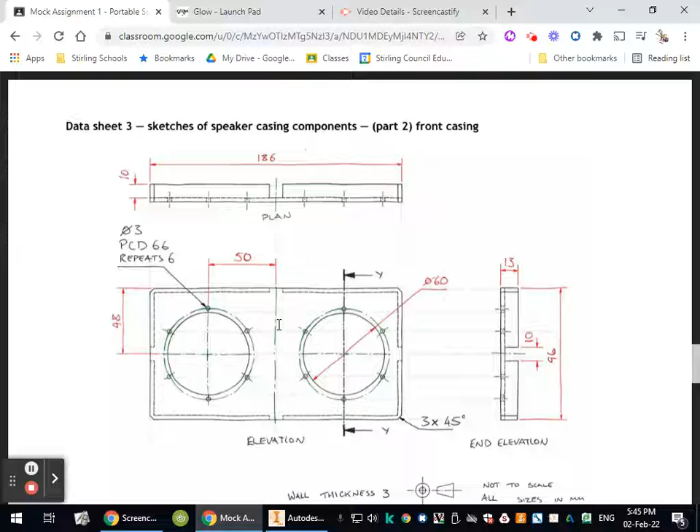So just because sorting out the bit in the middle that would have a gap might be a bit of a hassle, I think my inclination is probably just to model it as a whole piece rather than modeling one half at a time. But you could go about it that way. It doesn't really make much difference.

So let's get on with it. Its overall size is 186 by 96 and it's 13 deep.

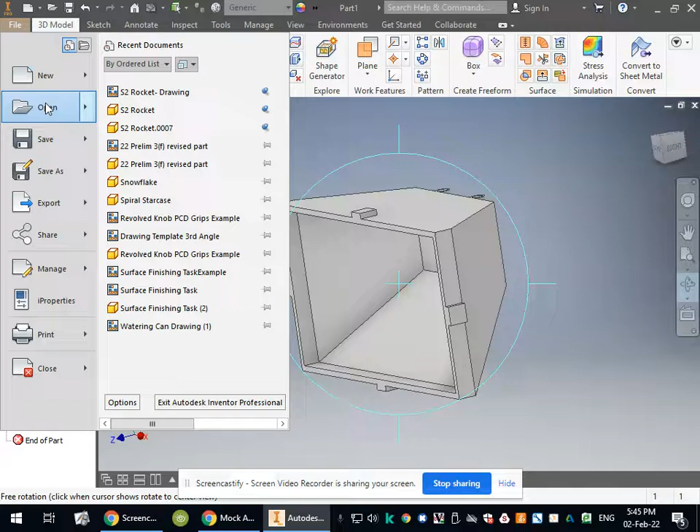So let's create a new part file. And again, pick our work plane that's going to orientate it correctly. And I would probably want to use, again, which one here? Yeah, 3. Try again, click on the wrong one. 2-point center rectangle.

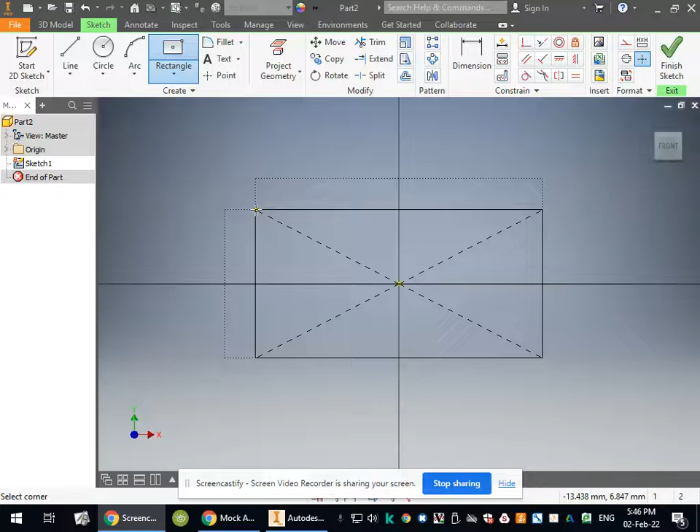So we said 186, 96, 13. So 186, 96. And we'll extrude that, 13, back the way.

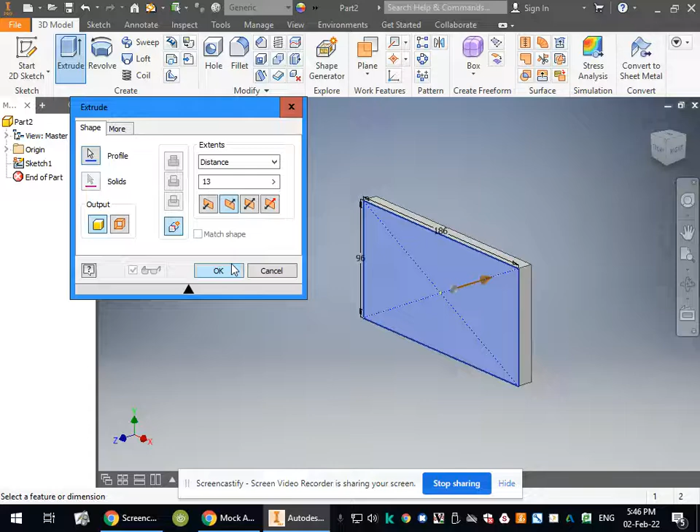Now, the next thing that we need to do at this stage is just to shell it. So we'll shell it from the back and we're going to give it a wall thickness of 3 as it specifies here. Shell, 3 millimeters.

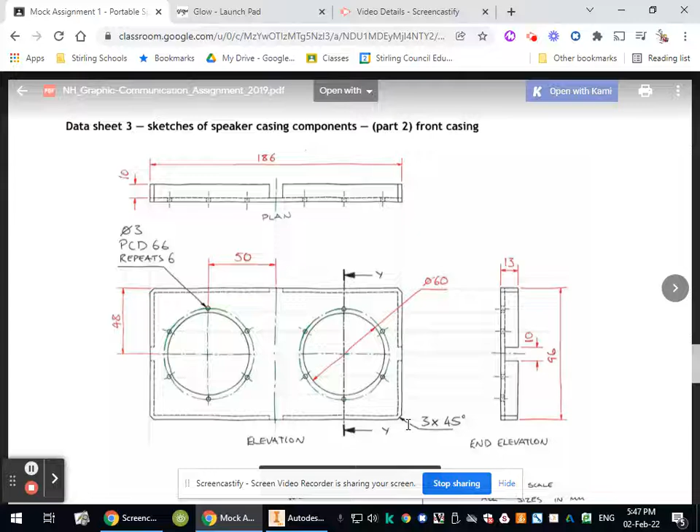And having done that, we could now add our chamfers to the corners here, and they are all 3 by 45, so that just basically means a normal 3mm chamfer. So we'll go around and find our chamfer tool, 3, we'll go select these. There we go. So that's that part done.

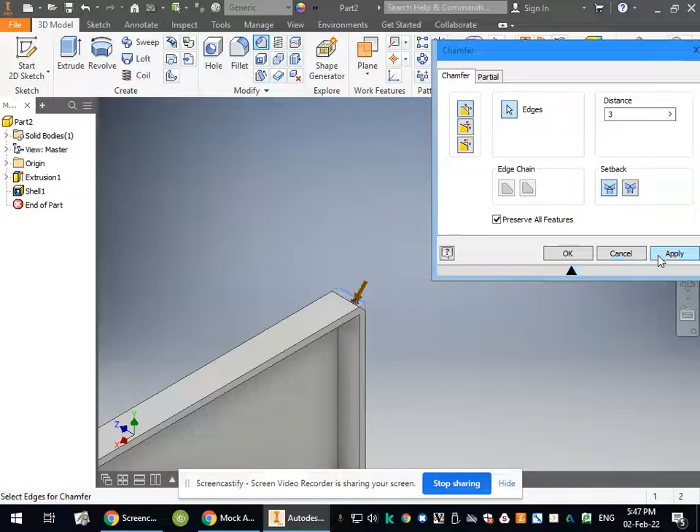Next thing I'm going to do is deal with these little notches at the sides here. So it looks like they only go down to the depth of the flat part of this here. You can see them cut out there. And the width of those are 10 millimeters. So quite easy to do that.

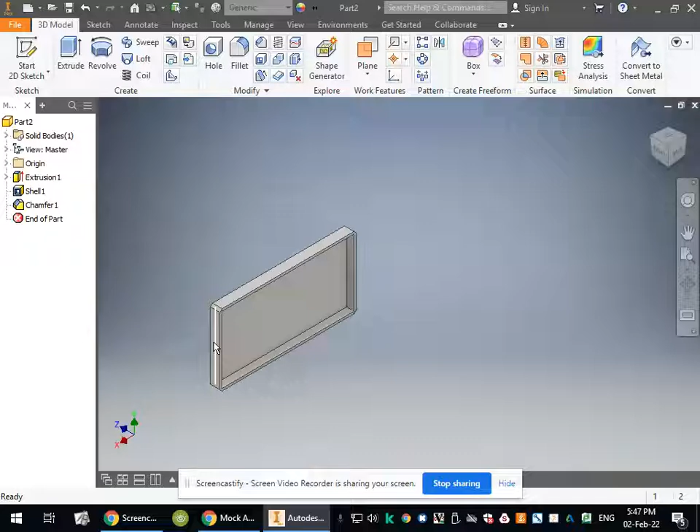We could do it in a couple of ways. We could sketch on the face or we could sketch on the side. It doesn't really make a huge difference, so I'm just going to do it on the side. And in terms of position, it appears that they are centered because the center line here lines up the middle of it. So we'll just assume that they're in the middle. Likewise with these ones, they appear to be centered.

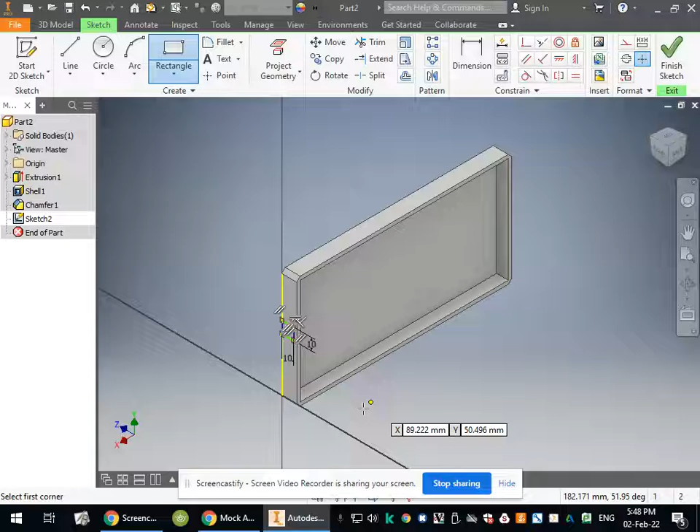So we'll draw a rectangle in here, make sure it's 10 millimeters by 10. And make sure I've got it in the right position because I think I started it on the wrong edge, so that was silly. Go back. I started on the back edge. So this side this time, 10 by 10.

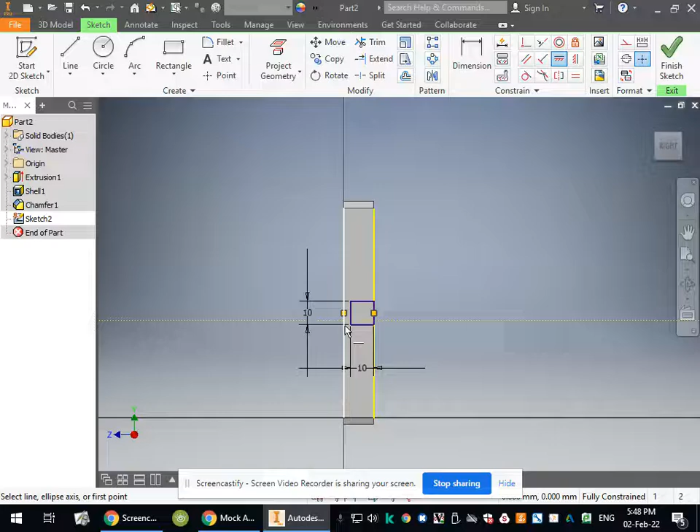And it's important that we snap it to that back edge because we want it to cut out to that side, not over here. We can then use our constraint tool just to position that in the center. And having done that, we can extrude it, cut, and 13 is fine. It'll just make sure it cuts through there. And the same thing at the top here.

So start sketch on here, rectangle, 10 by 10.

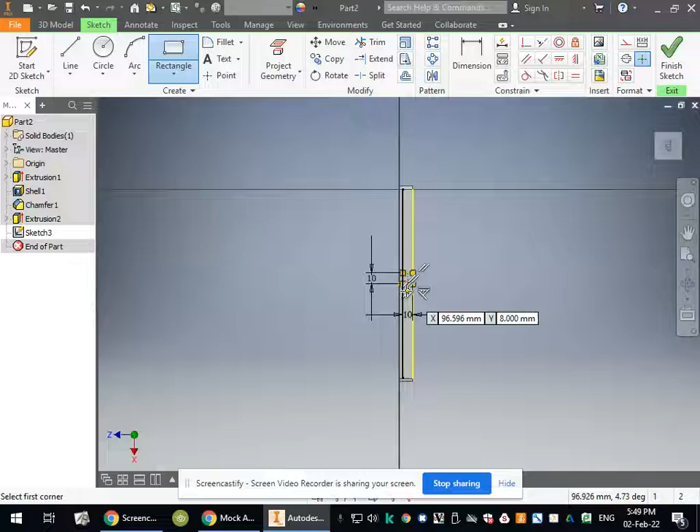And use our horizontal constraint here. Oh, that's curious. Oh, I think I know why that is. It may be... no, that's not. Let's just try that. I think I was actually trying to accidentally constrain this back edge here rather than the center of this, so I'll find the center point at this side. That's probably why it wouldn't let me.

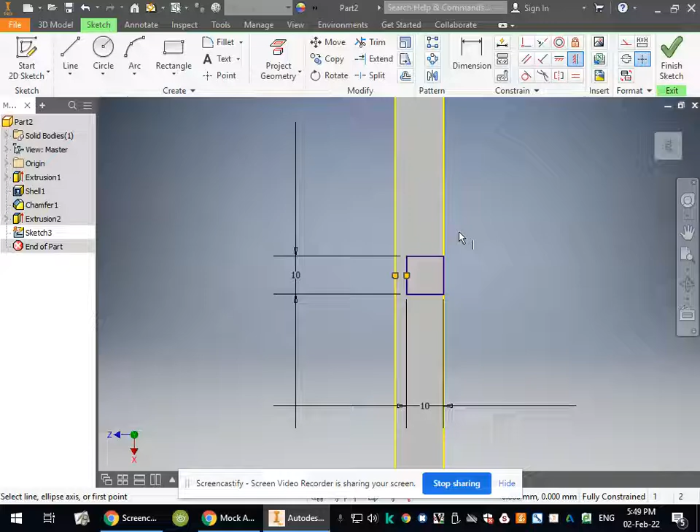Right, so we want to get that bit. Try again, this one here and that bit. Okay, that's it. So that is now constrained, and we can finish our sketch.

Extrude, cut, or should I say subtract. And we've got those two, and if we make our origin planes visible, we will be able to use those when we do our mirror here. So we'll just mirror that feature there.

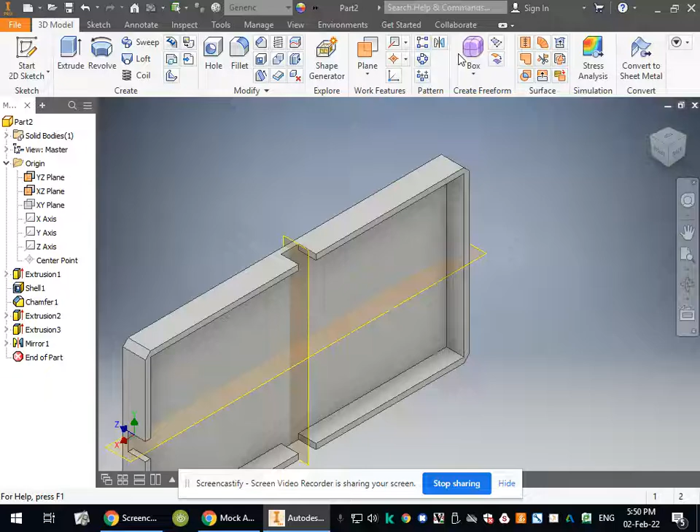Across that plane, and we will mirror that feature across that plane. So that's them all done. We're going to leave that plane visible because we'll need it when we create the circular hole feature, but we don't need this one visible, so we'll make it hidden again.

So going back to this, we have a circle which appears to be basically centered, and it's positioned 50 millimeters from the center of the object. It has a diameter of 50, so we'll do the hole first, the big hole.

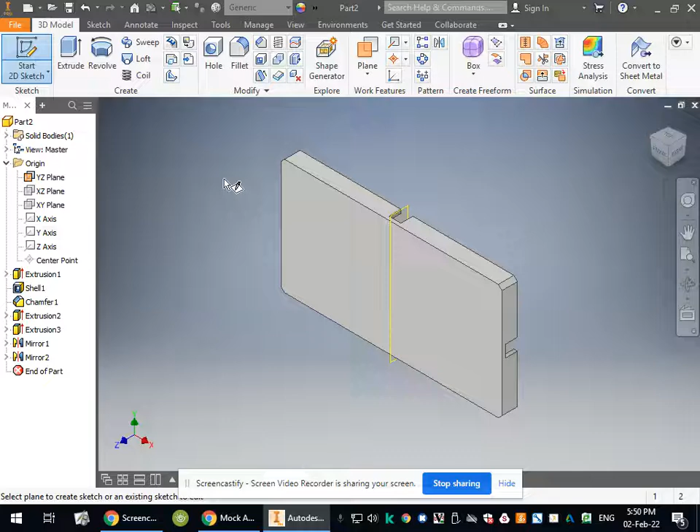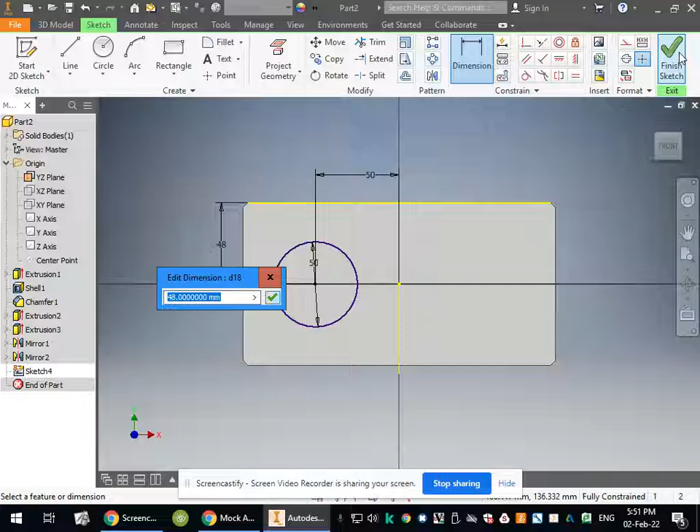So we'll sketch our surface here, 50, and dimension the center of that to the center. We've got 50 as well. We're happy, yep, that's where it needs to be. 48 should be kind of incidental because that'll just be halfway, but we could always constrain it by adding that dimension just to make sure we can't accidentally nudge it into the wrong place.

Extrude, again, extrude cut, or extrude subtract. And then we'll do another sketch here for the circular hole, and it is on a PCD of 66.

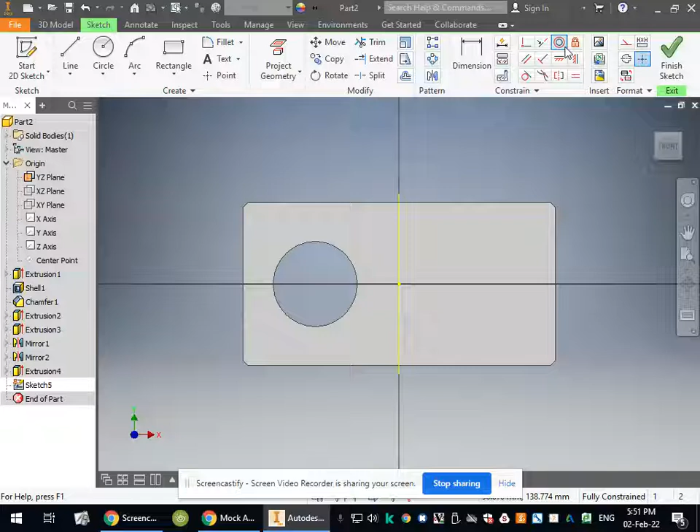So we will start by doing a construction line, the circle, to give us a kind of a center point. Oh, that's a pain. Hold on, we want to just get the center point off of this circle here, so I'll just project geometry from it. And now we should be able to do the circle.

That was going to be diameter of 66 because that's the PCD for the holes. So PCD basically just tells us the center point, or it gives us the diameter of a circle, which transcribes the centers of features that are usually arranged in a circle, like holes that are arranged around a center in a circular kind of pattern.

I'll just double check that. That looks a wee bit off to me. It looks like that's bigger than it should be. I'm just going to double check that I haven't made a silly mistake. I think I might have when I did that extrusion here.

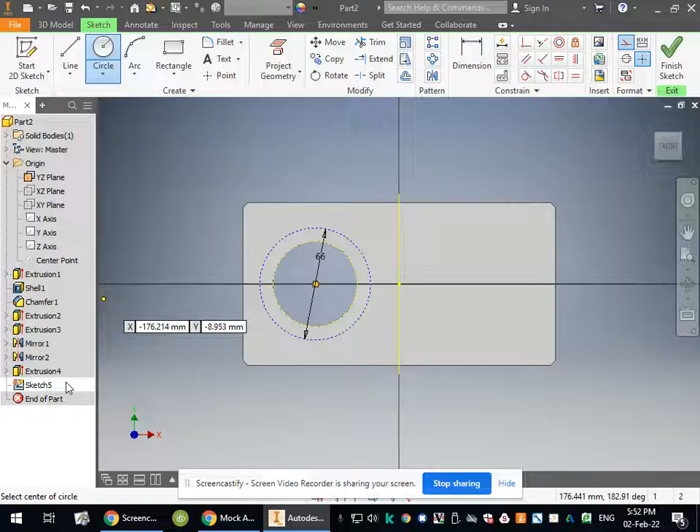Yeah, I did a silly mistake there. So that should have been, that hole in the middle should have been 60. So I'm just going to finish the sketch and I'll go back and fix that. That's why it's always good to just keep an eye out if something doesn't look right. Probably isn't, so that means you need to go back and sort it out.

And now when we look at that, the relationship looks a bit better. So diameter 3 hole repeats 6 times.

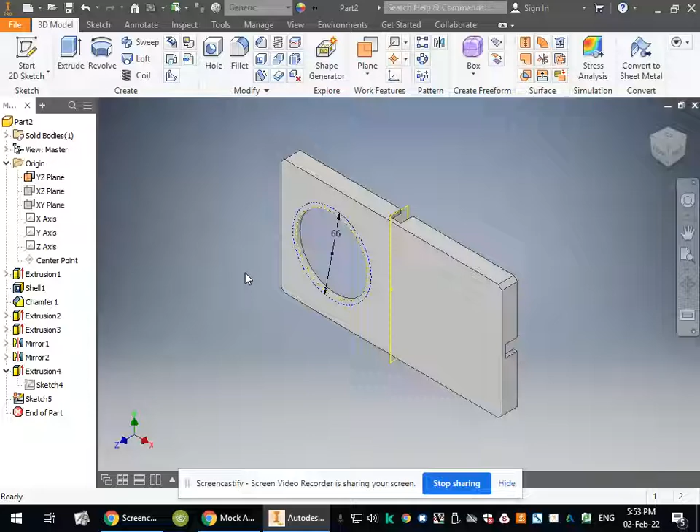So we'll open that sketch back up, and we want that first circle to be really dead center at the top here. So if we hover over the middle, we'll get that trace line that tells us we're aligned. And we want that to be centered on that outer circle, 3 millimeters. And I'm going to extrude that through to cut.

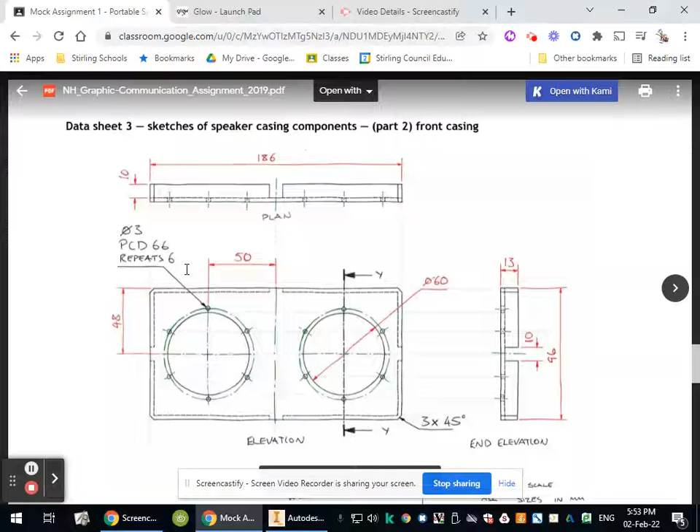So we've got one of these, and we should now be able to array that feature around the outside. So if we go up to here, use what we call a radial array, try and grab that guy there, use that circle as a rotation axis, and it's fortuitously guessed that I need 6, so we can just make that happen.

Now all we need to do is mirror this and this feature, and then mirror across this plane, and that would appear to be that part completely done. Let's have just a double check, make sure there's nothing else that we need to do.

And no, that's it. So as always, it'd be a good idea at this stage to use your measure tool. Just double check the key dimensions, look over it, make sure that nothing silly has happened, that you've not made a silly mistake somewhere. But that's all good, so we could call that done and move on to the next part.